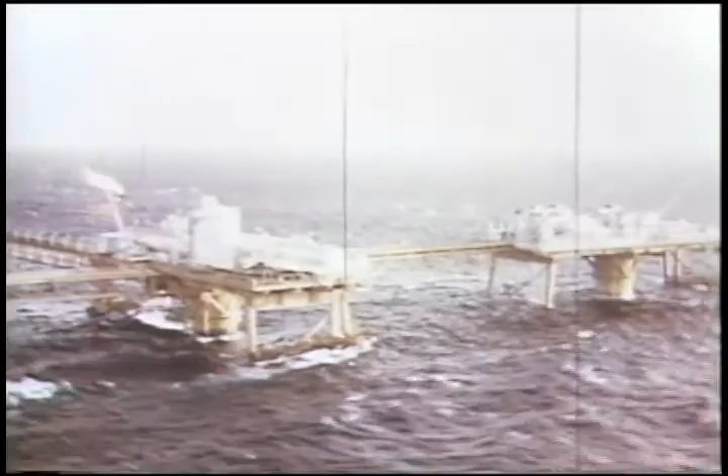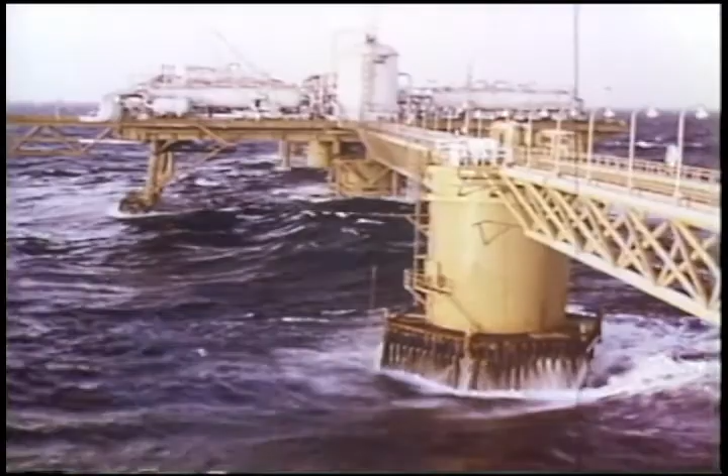And 3 massive undersea storage tanks called Khazzans, each with a capacity of 500,000 barrels of oil. Around such facilities, an oil spill now would be especially dangerous. The oil could ignite at any time.

The danger is real. The fire is consuming 40,000 barrels of oil and 19 million cubic feet of gas a day, enough to fuel a city the size of St. Louis.

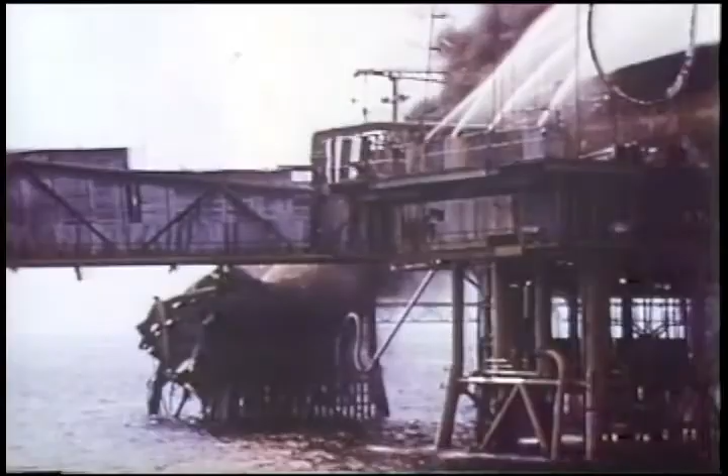Flames leaped 450 feet into the air. The heat was so intense that the deck section of the massive steel platform melted and the drilling rig toppled into the sea.

To protect the remaining facilities on adjacent structures, heat shields of corrugated steel are fabricated and put into place. With the fire contained and the other facilities safe, engineers can turn their attention to putting out the fire.

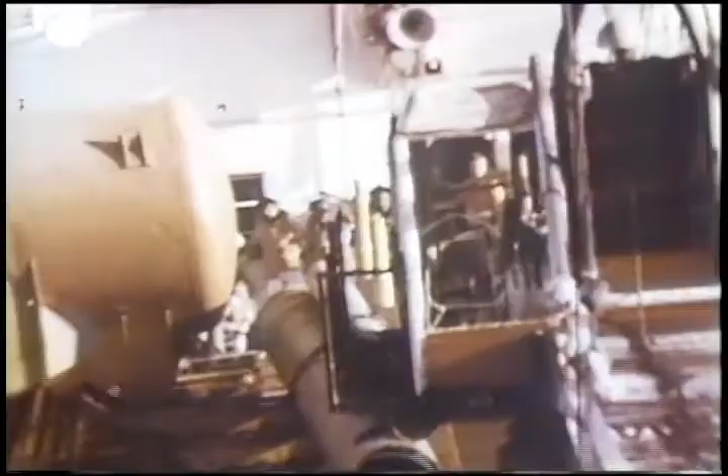From Houston, Red Adair's crack firefighters have been summoned. One technique under consideration is for Adair's team to set off an explosion on the platform. Momentarily, without oxygen, the blaze will die.

The procedure has a drawback. After the fire is out, 3 days will be needed to shut off the flow from the well, 3 days during which more than 100,000 barrels of oil will spill into the Gulf.

While other techniques for extinguishing the blaze are being evaluated, a barge with heavy-duty Adair pumps and monitors is towed in to give the overworked fireboats a breather. They have been operating around the clock since the fire broke out. The pumps pour 10,000 gallons of water a minute onto the structures.

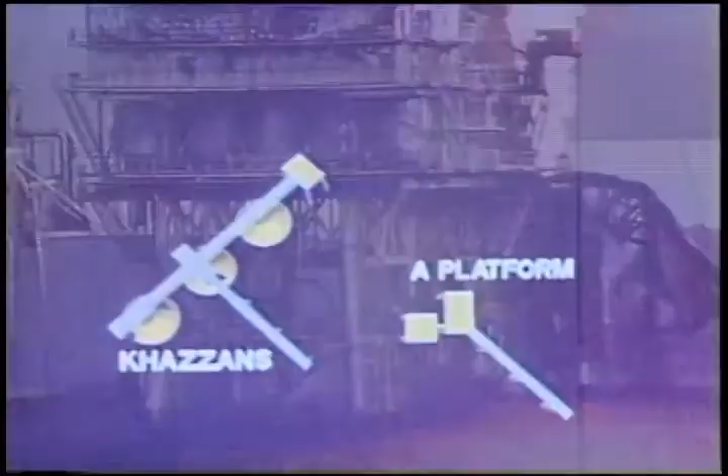Dubai Petroleum Company weighs the alternatives and reaches a quick conclusion: drill 2 relief wells to kill the burning well.

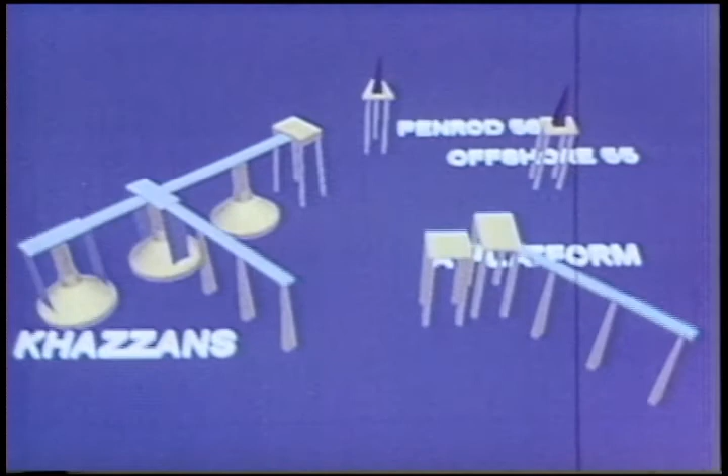From neighboring Abu Dhabi come 2 jack-up type drilling rigs, loaned to Dubai Petroleum Company by Abu Dhabi Marine Areas Limited, operated by British Petroleum Company.

The rigs are quickly readied. Hunt Oil Company's Penrod 56 is the first to arrive. It spuds a directional relief hole 9 days after the fire erupted. The offshore company Rig 55 spuds the second relief hole 2 weeks later, on November 9th.

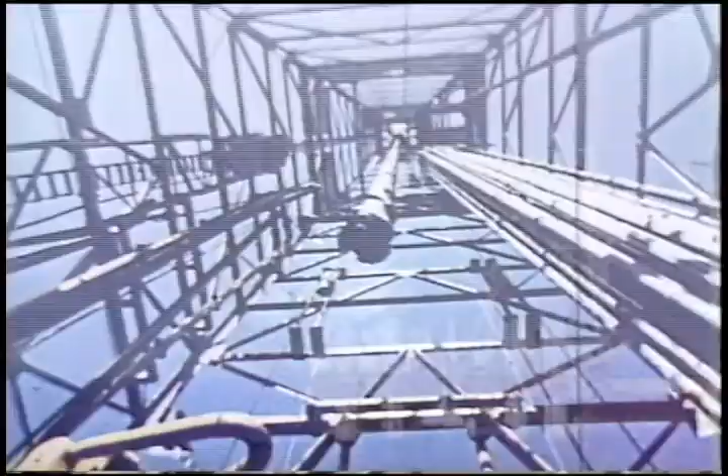Both rigs drill as rapidly as possible, 24 hours a day. Accuracy is critical. The holes must be carefully aimed to intersect the A2 well. There is no margin for error.

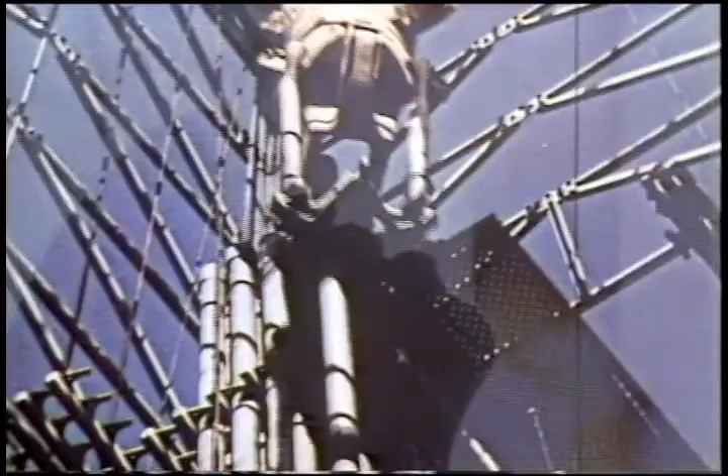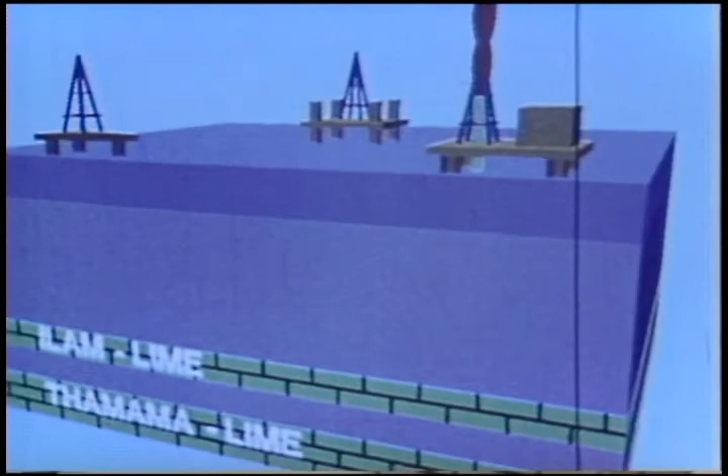The Penrod rig's target is to intersect the A2 in the Ilam Formation at 7,500 feet. The offshore 55 is to intersect it in the Thamama Formation at 8,300 feet.

The burning platform contains a producing well, the A1, which has been shut in by subsea safety valves. However, if the A1 should also catch fire, the drilling program prepared for the offshore 55 includes a plan for redirecting the hole to intersect the A1 wellbore instead of the A2.

Contingency plans are laid for a quick spill cleanup program. A spill will result if the fire is extinguished, but the well is not completely killed. Equipment and chemicals from around the world are placed at strategic locations.

Spill containment booms are spotted around the facilities. Plans are made for coping with the worst possible spill conditions to minimize the likelihood of environmental damage or fire on any oil that is spilled.

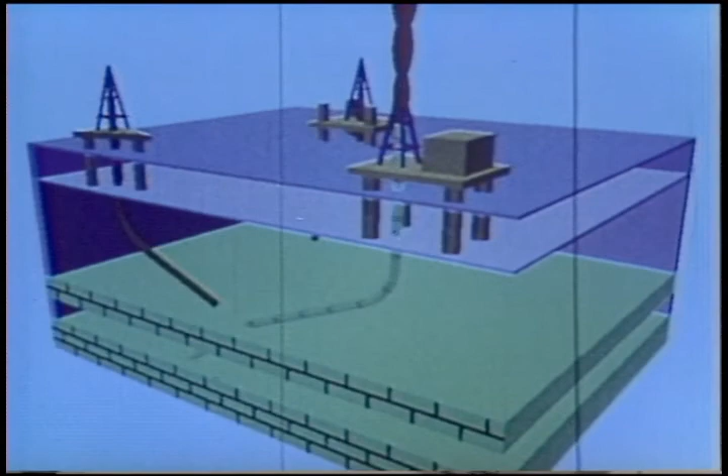The drilling progresses. Completion of the relief well to the Ilam Formation will come first, but this formation produces only about 10% of the oil feeding the fire. The kill through the Ilam Formation is therefore more difficult. It may not work.

The Penrod rig intersects the Ilam Formation within 5 feet of the burning A2 wellbore. The kill will be attempted even before the offshore 55 reaches the Thamama Formation in a few days.

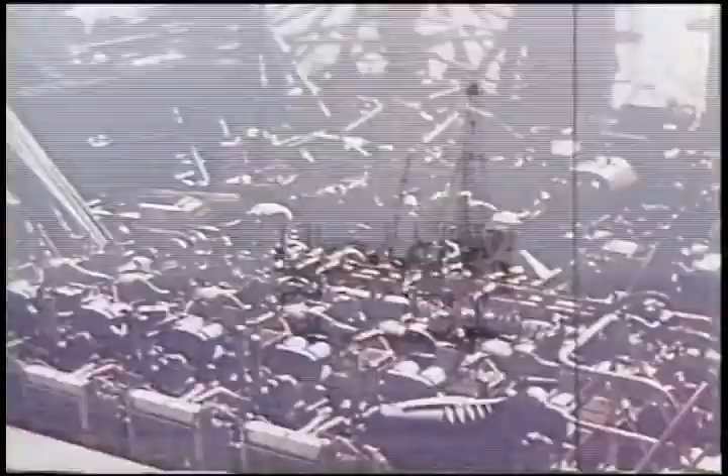On the Penrod, high-pressure Halliburton pumps are readied and connected into the wellbore.

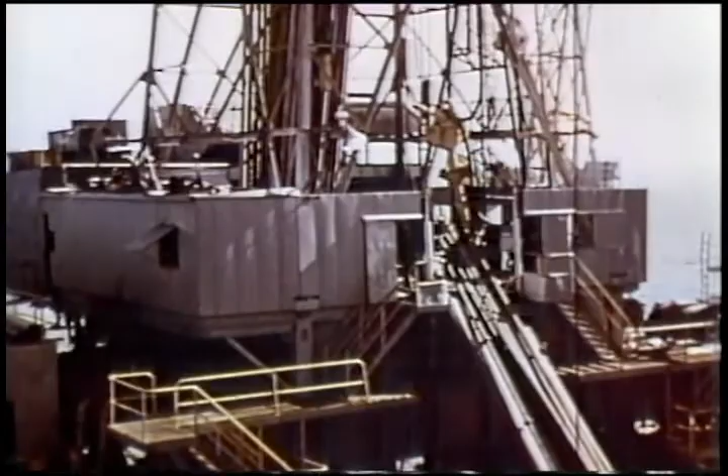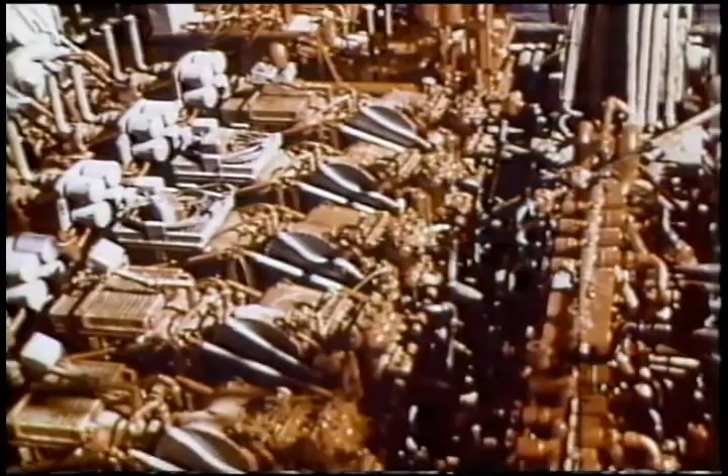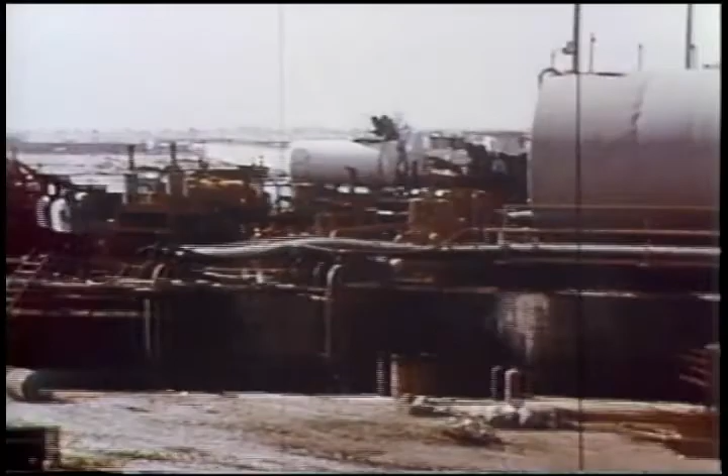While the drilling was underway, workers on shore had built a mud barge, nicknamed the Big Muddy, carrying 6,000 barrels of heavily weighted drilling mud. If water pressure alone does not kill the well, mud will be used.

The barge is brought into place beside the Penrod rig. Everything is ready for the kill.

When a relief well reaches its objective in a permeable zone near the burning well, communication is established by fracturing across the formation to the well that is blowing.

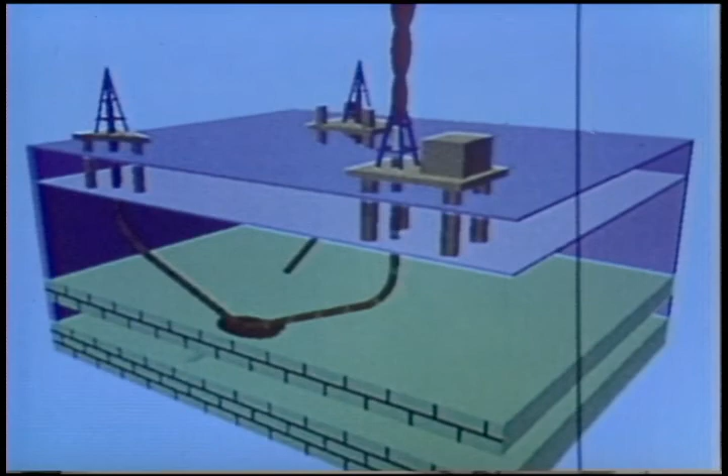Initially, water is pumped down the wellbore of the relief well across the formation and into the blowing well. As more and more fluid is pumped down the relief well, the blowing well is loaded from the bottom. The oil flow is eventually stopped. The weight of the fluid acts as a plug.

The critical moment is at hand.

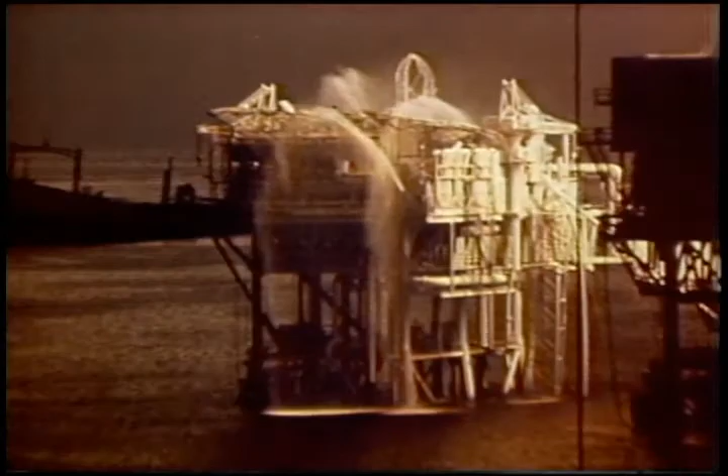An army of men is waiting. Pumps have been tested. The mud barge is in readiness. Spill containment booms are deployed. An armada of 31 vessels is in place, each with specific assignments. The process is timed, so the maximum possible amount of daylight will be available for capping operations.

Communication has been established between the relief well and the well bore feeding the fire. Fluid begins to break through to the burning well. As the amount of fluid increases, the fire sputters,

reignites, sputters again. And at last, it is out, permanently.

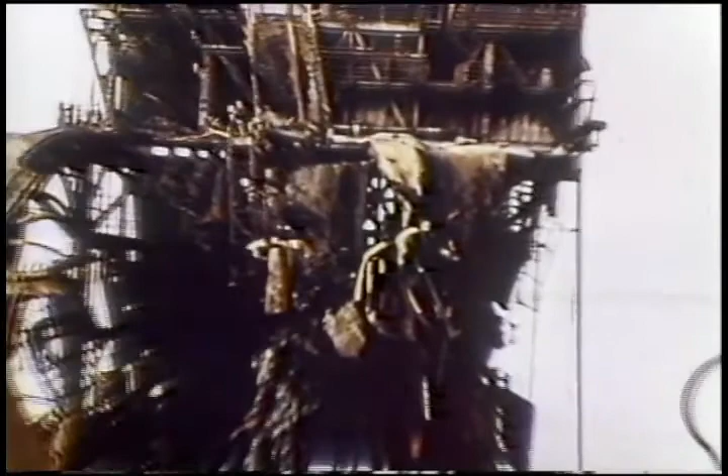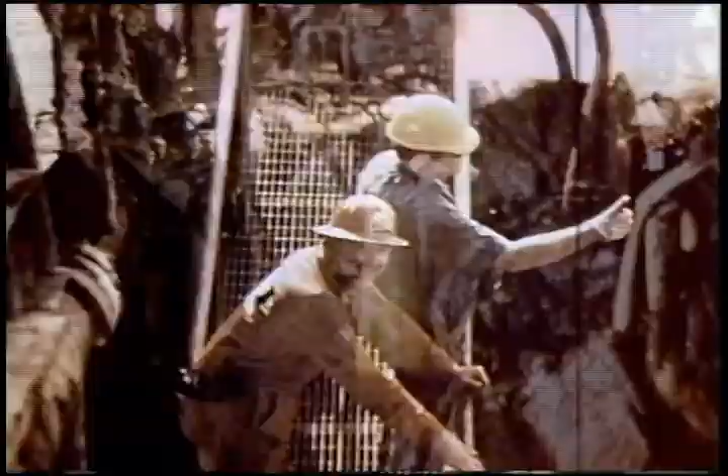The wellhead remains, stark evidence of the fire's intensity. Work crews begin to assess the damage. Water sprays continue to cool the platform.

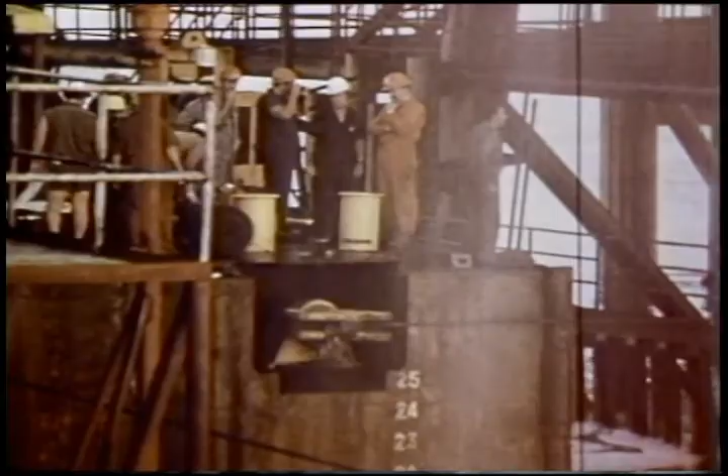To seal the A2 well permanently, a wireline logging unit is rigged on a derrick barge. Then, a permanent bridge plug is run into the well bore.

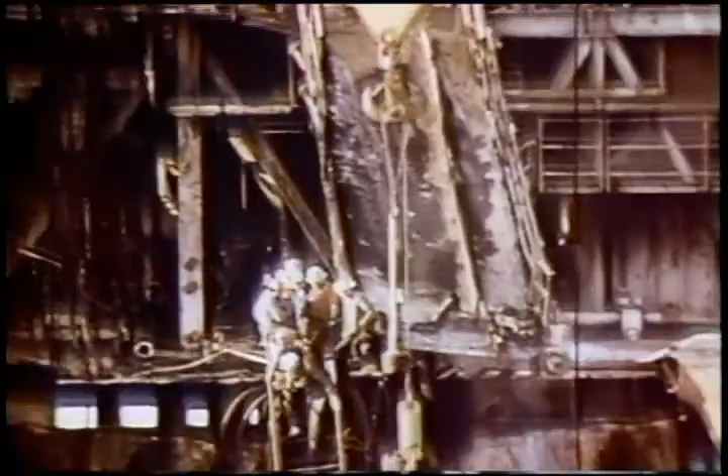Though the subsea safety valves had held the nearby A1 well, a new wellhead has to be installed.

At last, the arduous process of cleanup can begin. The field facilities are reconstructed.

The kill operation has gone exactly as planned. The fire is out. The well is killed. No oil has spilled into the Gulf.

49 days have elapsed. At last, men and equipment can return to everyday routines and the business of producing oil.

Today, operations are back to normal. Tankers once again are loading much-needed crude oil from the rich fields of Dubai.